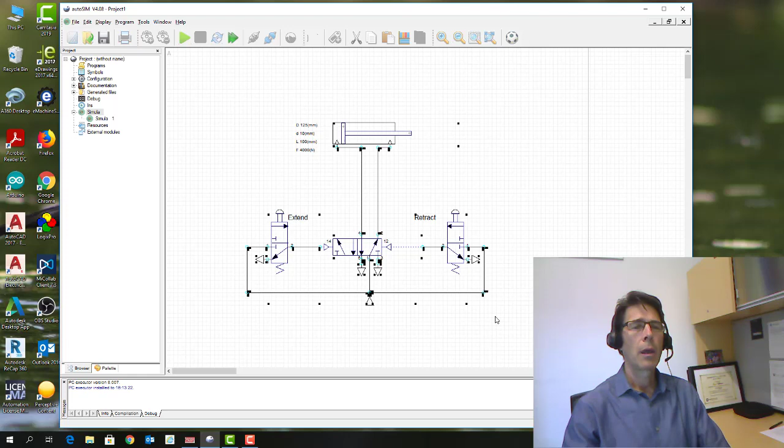Okay, so now we're going to make some modifications to this circuit, and rather than start over, what we're going to do is copy this entire thing. I'm going to leave this circuit just the way it is, make a copy of it, and scroll down a little ways and paste it below the original.

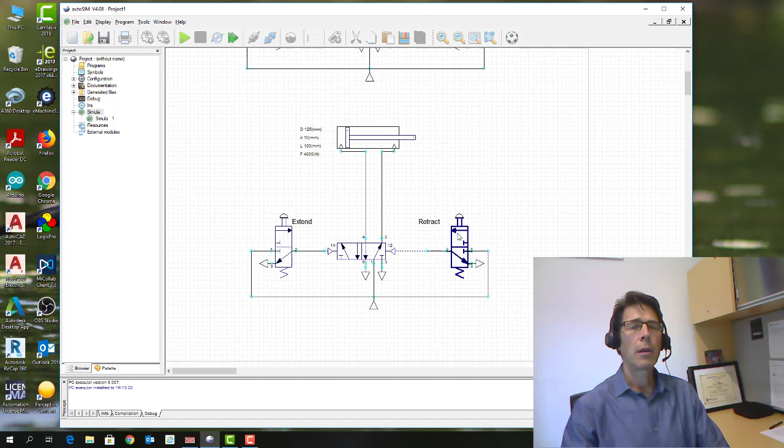So what we're going to do now is add some automation to this. And rather than have a manual push button to do the retract, we're going to put a little automatic pneumatic limit switch out here so that when the piston extends, it hits the limit switch and causes the cylinder to automatically retract.

So first thing we have to do is add a little end to the cylinder, so that gives the cylinder something to push, that it's going to push on this limit switch.

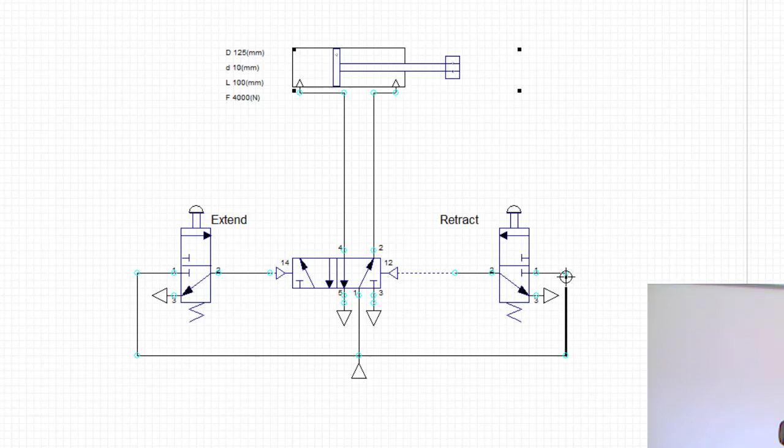And then what we're going to do is just modify the retract sensor. I'm just deleting the lines and going to move it up a little bit. And I think I'll take out this retract label just because it's going to get in the way.

So if I want to turn this sensor into an automatic limit switch, the valve is actually going to have the same format. It's going to have the same paths and ways through the two sections. So if I double click this, I'm just going to replace this push button.

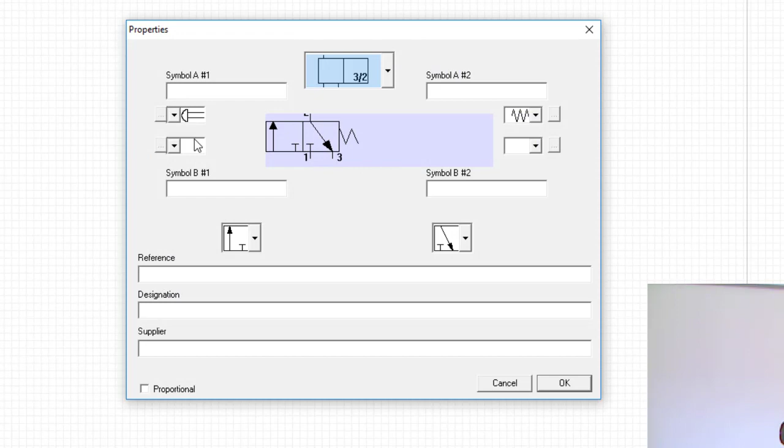If I scroll way down here to this, this is where the limit switches are. Click on this, and click OK. And it comes up looking like this.

And what I have to do is position this so that when - oops, I didn't want to do that - just going to select it. I want to position this so that when that valve extends, it hits the limit switch. I think that's the right position.

We'll find out when we run it. It's a little bit of, I can't really tell how far that valve is going to come out, but we'll find out.

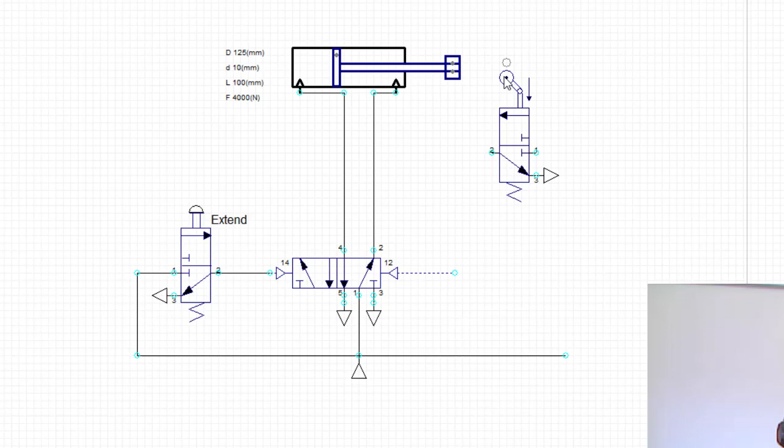So this represents a little roller mechanism that when the pneumatic piston comes out and hits it, it pushes the valve down instead of a manual push. So I'm just going to reconnect the lines.

When you're connecting lines with AutoSIM, whenever you want, if you just go to where you want to go, it kind of finds its own path. But if you want to determine the path for the line, you have to click every time you want a corner.

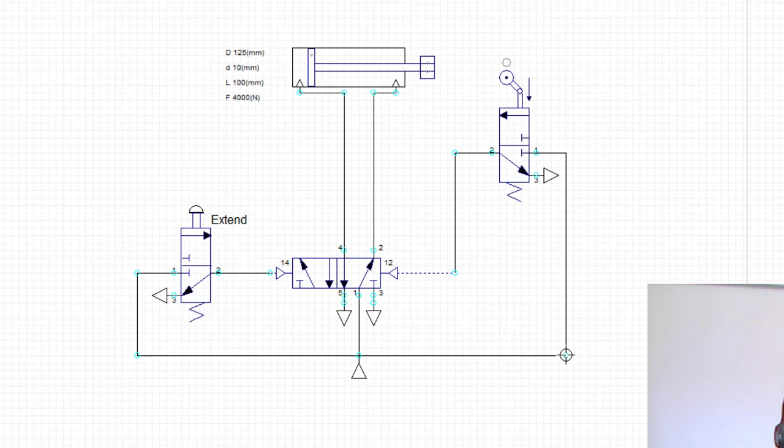All right, so that should do it. Let's just find out if this is in the right position. So I'm just going to run it again by clicking the soccer ball, and there it is. Okay, I guess I guessed right.

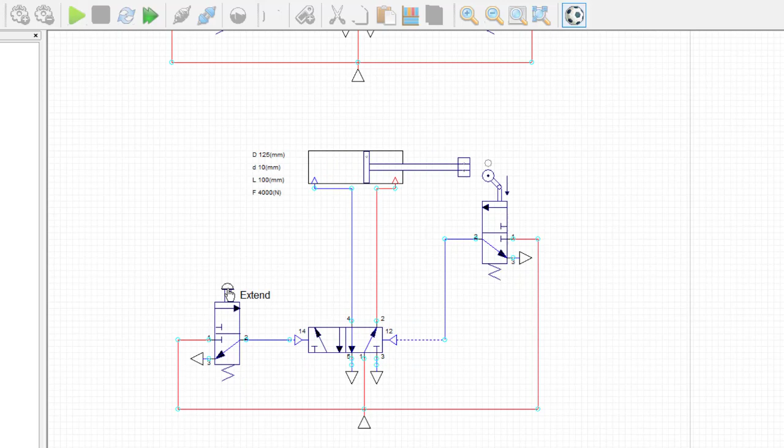So notice what happens now is I hit the button, it moves out, and then it automatically, when this pushes down, it shoots compressed air into this side of the valve and pushes it back to its original position. So this push button moves it to the extend position, and this one moves it back.

Okay, let's stop the simulation. So I want to add something to make this a little more interesting. There are flow control valves that are designed in pneumatic systems to limit the rate of airflow and thus limiting the speed at which the piston extends and or retracts.

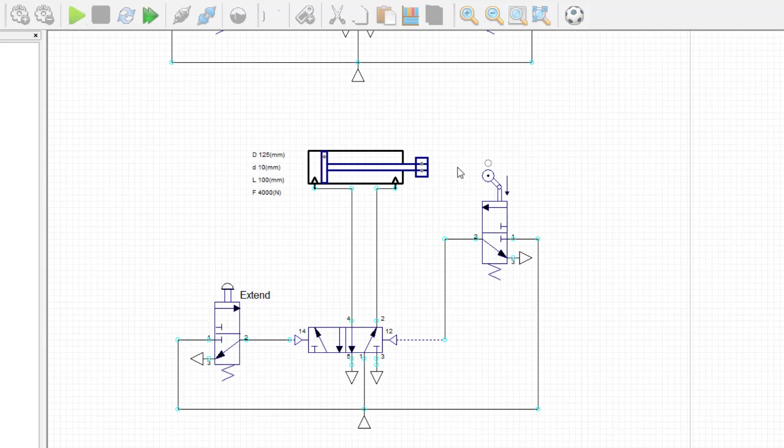So to get the flow control valves, right click, add an object, and under pneumatic there's a category for flow control, and the one I'm going to use is a throttle one way. They do have just the throttle valves, and they have a few that are fixed at 75% flow, 50%, 25%. There's a variable throttle that you can double click and adjust.

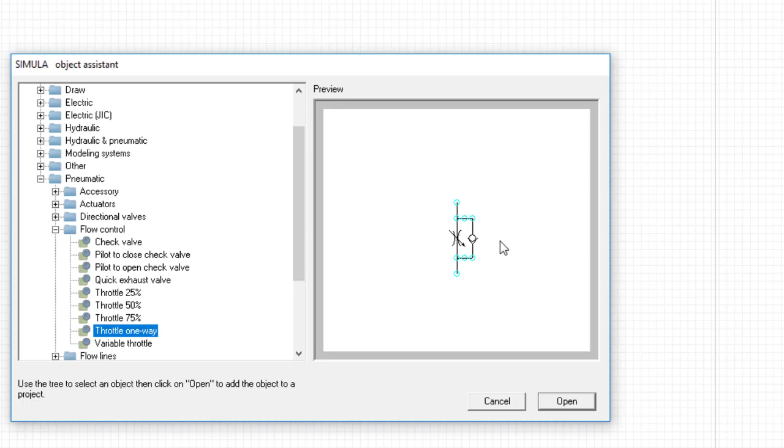There's also a check valve, but the throttle one way puts the check valve and the flow throttle into one component, so it just saves a little bit of time. It also is a little more compact. So I'm going to open that, and I have to delete this connection and insert this in.

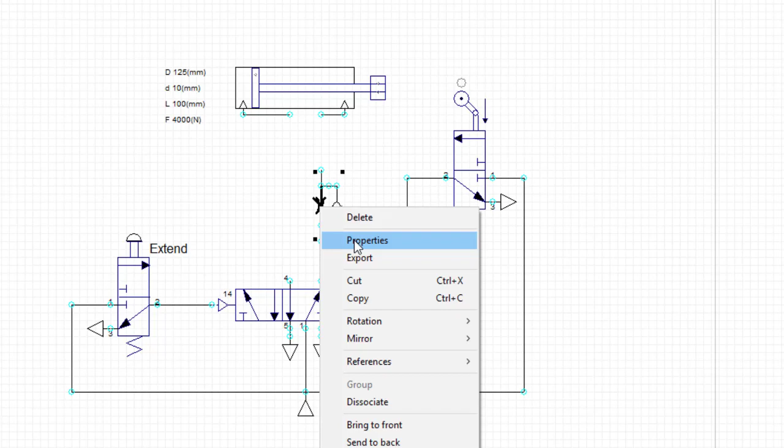And I have to put another one on the other side, and I'm just going to take this, copy it, and mirror it horizontally.

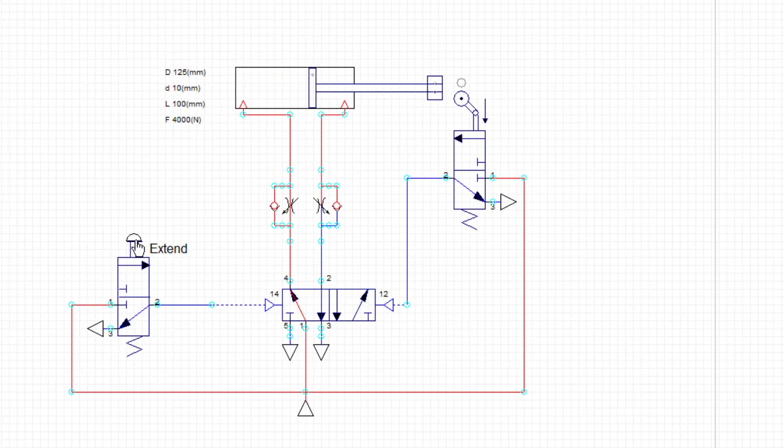Okay, now we're just going to connect those lines back the way they were. So if I run it now, it's not going to behave much differently than it did before. Maybe that's a little slower, I'm not sure.

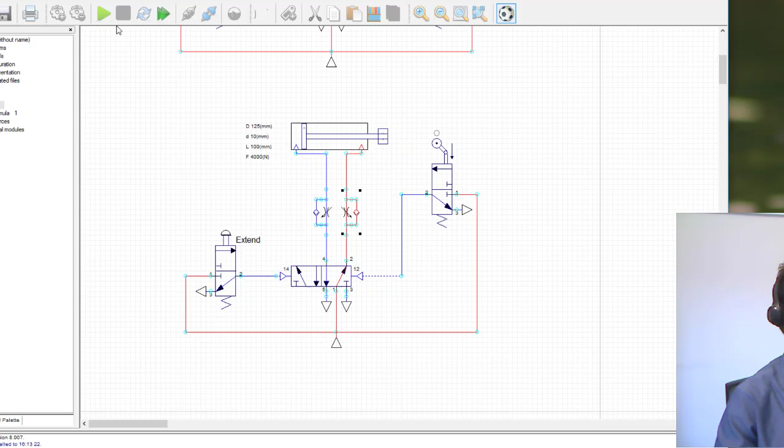But if I really want to see the effect of the throttle valves, if you double click any one of these, you can type in the percentage of opening that you want. So let's say I want this to be 40%, and I rerun the simulation, now notice how slowly it extends. So what's happening is, let's zoom in actually.

If you look at the way the throttle valve is set up, in parallel with it is a check valve. If the air's coming in this way, it's going to freely flow through that check valve, so the throttle valve has no effect. But the air flowing out will not be able to flow through this check valve, so it'll be forced through that throttle valve.

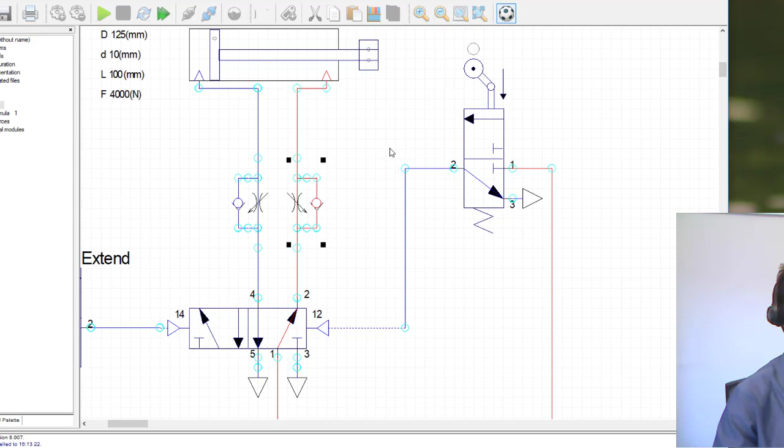The reason this is done is so you can have separate controls for extend speed and retract speed. If you notice, right now the air is being forced through the second throttle valve, so the extend speed is affected.

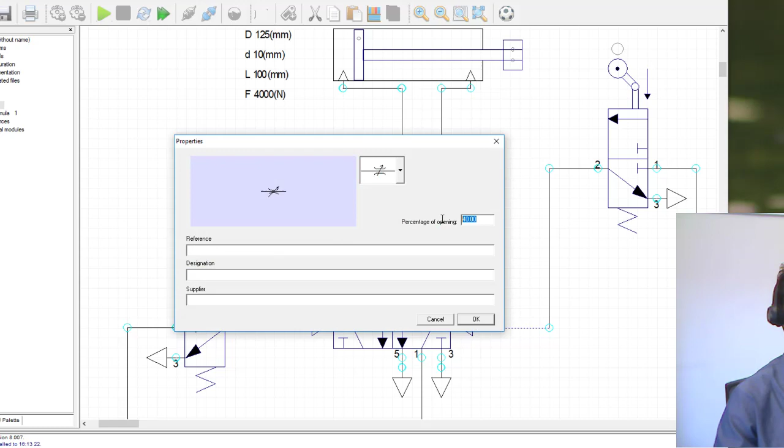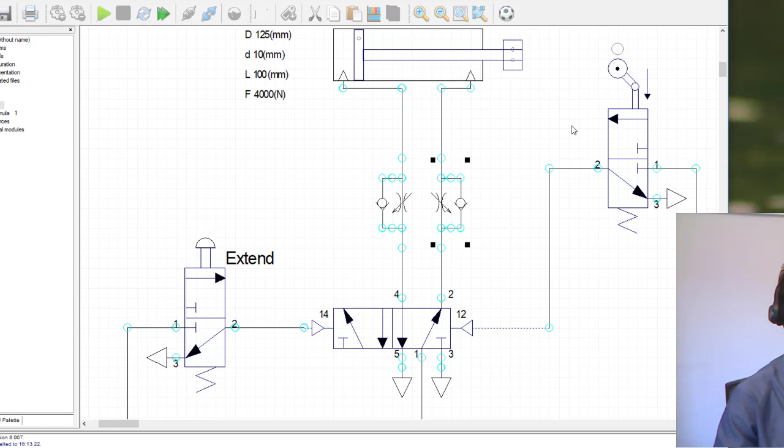If I want to affect the retract speed, let's make this 25%, really make it slow. And then we'll put this back at maybe 80%. Run the simulation. Now we've got a fast extend and a very slow retract. So those are useful components for controlling the speed of actuation.

The last variation, we're going to add another limit switch on the retract side, so we should get a reciprocating motion. When it extends, it's going to hit this limit switch, and that's going to push air into the valve to make it retract. When it retracts, it's going to hit another valve and push the cylinder the other way, so it'll extend. It should keep just going back and forth.

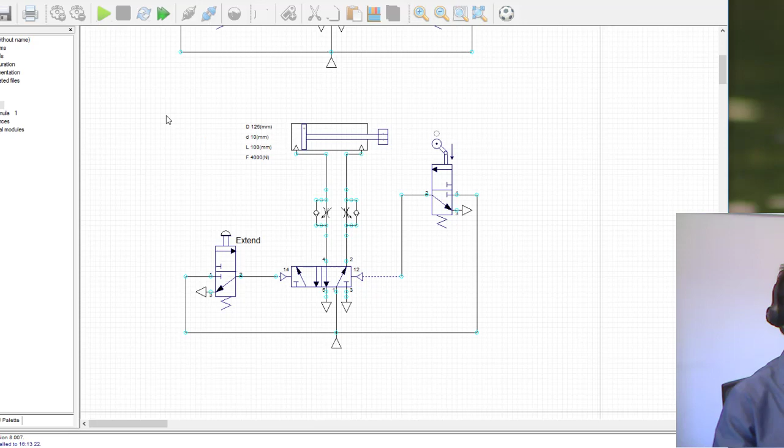I'm going to make a copy of what I've got here and scroll down a little further, then paste the circuit. I'm going to delete some of these lines—we'll draw them back later—just to make some room for the second limit switch. We're going to use the exact same component.

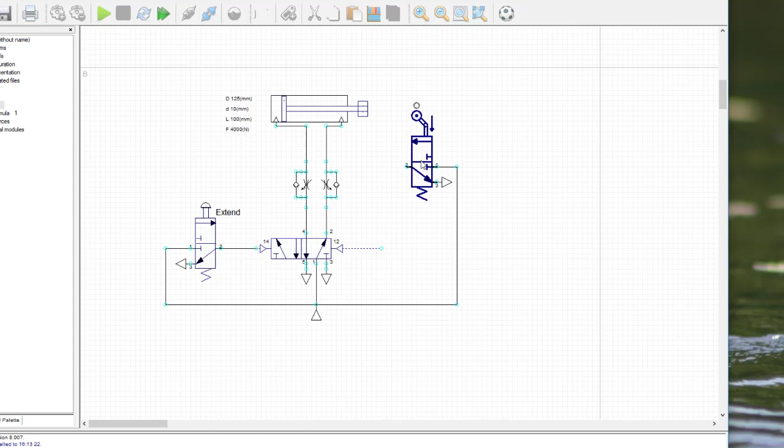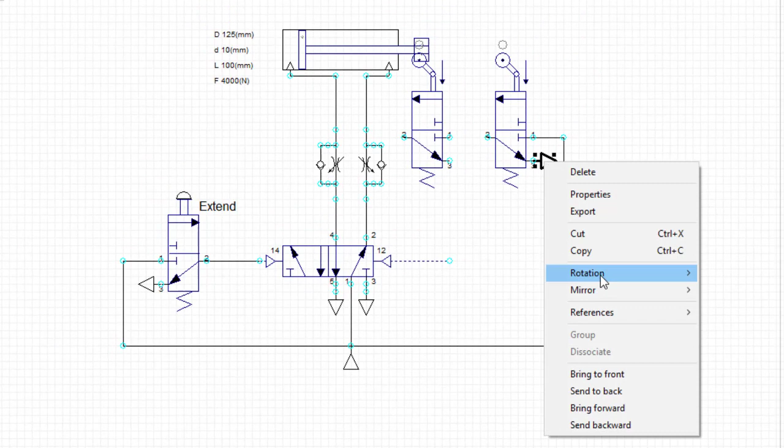Copy, paste it right there. I have to put in another exhaust port on this one. And now I've got to get this out of the way for the time being.

Might as well get rid of all these lines because they're just in the way. I'm just going to move this off to the side—we're going to be using that later in a different way.

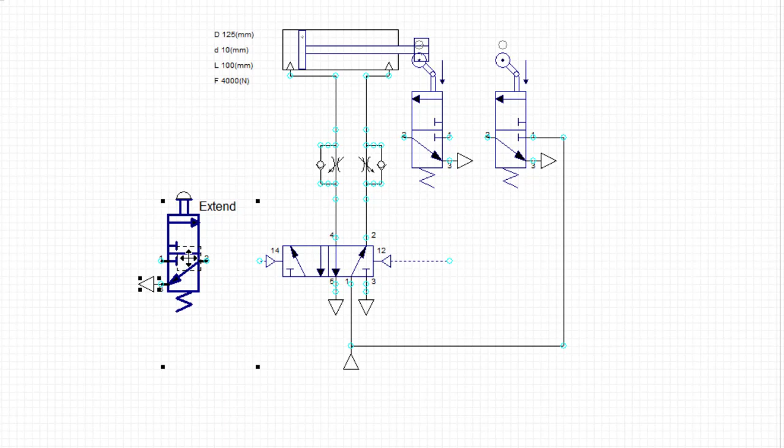Now I'm going to hook the output of the extend limit switch back to the port that will cause this to go to the retract position. And now I want to connect this one over to the extend position.

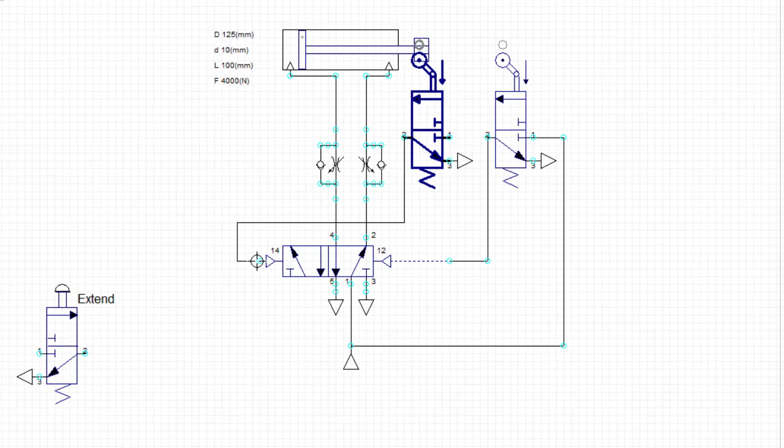The only thing I'm missing is I need to have this port connected to compressed air, so I'm trying to think the best way for me to do that. I'll draw that in from here.

And then reconnect this. So I've got compressed air coming into port 1 of each of these. When it flips to the other position, it's going to allow that to flow out of this port and control the valve. So the only thing left to do is, rather than having compressed air on 100% of the time...

I'm going to use a valve to turn the air on. Let's bring this one over. I'm going to connect compressed air—first I'm going to rotate it. Connect the compressed air to here, connect the exhaust to the exhaust port, and then tie it in here. So that will be the compressed air line.

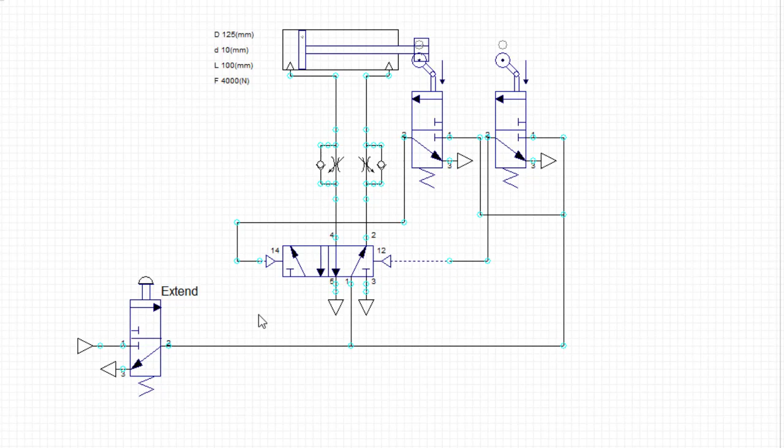A push button would be something that you'd have to hold your finger down the whole time to keep the compressed air on. We want to change that to a valve that we can switch to the on position and switch it back off. So down here near the bottom is a symbol—that's the symbol for a valve, a 2-position valve.

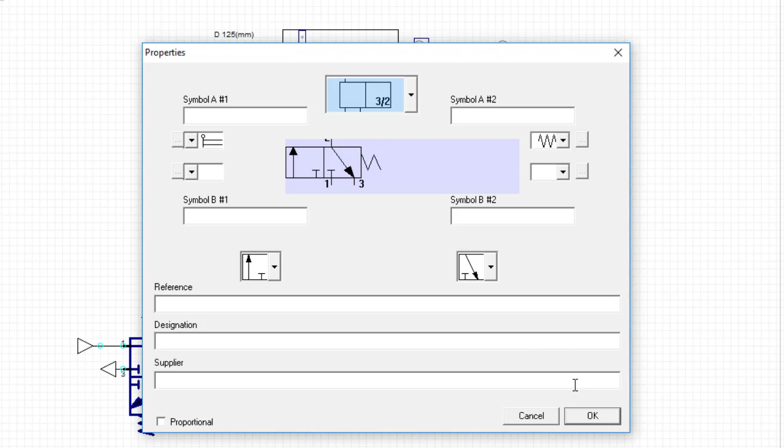You notice that it moved into its default, de-energized position. So what you can do is double click, and you notice when you're at this point, the symbol up here is moving back and forth. So wait for it to move to the position you want and then click OK. I want it to be in that position, so just click OK.

All right, I think we're all set. Let's give it a shot. Turn the simulation on, and there it goes.

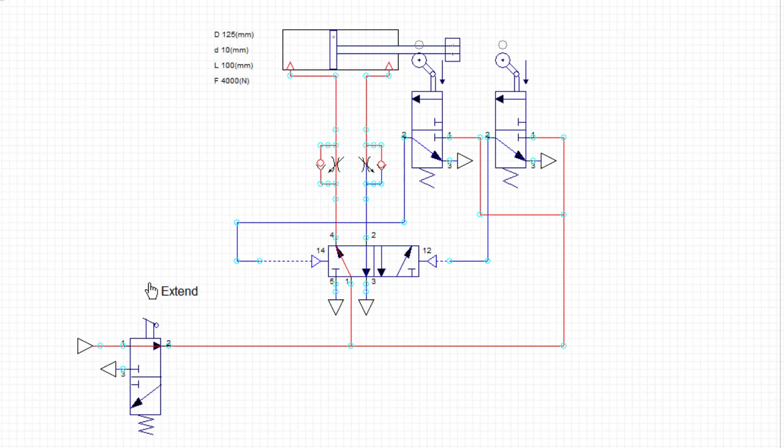Now I had adjusted the valves, the throttle valves, so that the retract is very slow. You can play around with that. And if I flip the valve off, it'll just stop wherever it was.